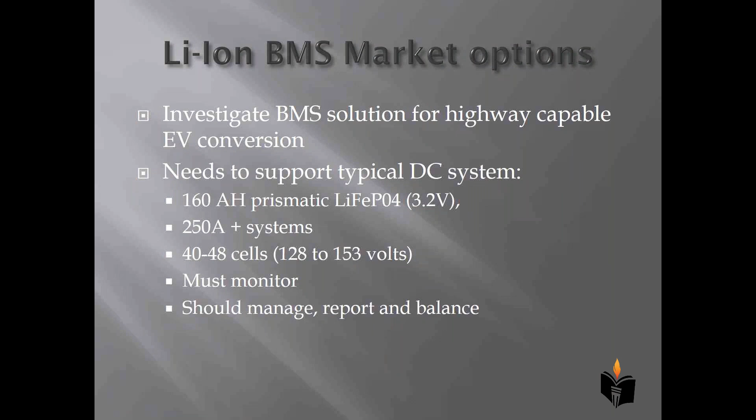So let's elaborate on it. The lithium ion BMS options we could have: Agni Motors Stybrook Limited, which has the distributed topology. I again review the type of topology we discussed in our last session, on Wednesday, not Thursday. We discussed three types of topologies: distributed, modular, and the third one missing here, that is centralized type of topology. So we discussed three types of topology.

Accordingly, we have to select the particular manufacturer based on which type of topology they are giving us, and whether they have all those functions included or not. That is a consequence we need to always consider while doing the selection, for our own car as well. We need to check, for reference, which type of BMS they are using, and for how much life cycle it can go up to. These are the certain facts we always carry on, and accordingly we select one type of BMS.

So in the distributed topology from Agni Motors, we could have number of cells about 1 to 200. How much battery is balanced during depletion and state of charge, they let us understand by indications, either by highlighting a particular red color code, or just giving indications. Temperature would not be available, display will not be available, fuel gauge will not be available, over volt protection will also not be available. Communication will be through wire, by putting up the wire.

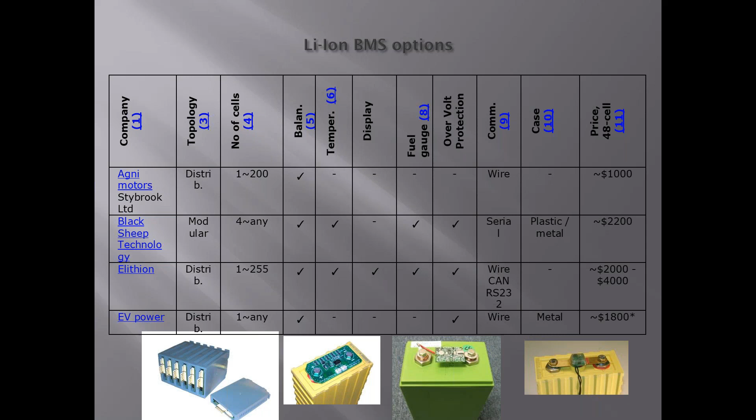Similarly, let's take a look at this. We have high tech systems, SSI, Ningbo, Yangming, Elite Power, BMS 50, and PackTrakr from KJ Hall Motor Company. Pack Tracker is, by default, what many e-rickshaw developers have already adopted this topology if they are making it for high extent or high valued e-rickshaws. Likewise, Mahindra have just recently adopted one. So such e-rickshaws having lithium battery are certainly taking up Pack Tracker. However, REAP systems, we have Volt Blocher.

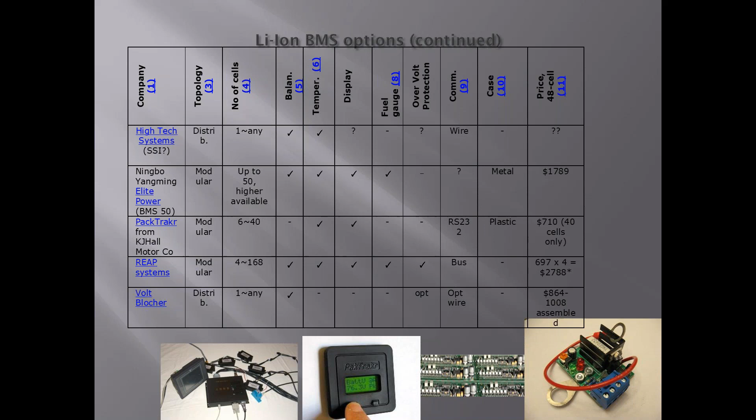Most commonly we could have the modular type of topology, and some of them would have distributed type. Centralized type has not yet come into the market, but it's in process and it will get developed, unless it should not get heated up due to the operation. So that's a thing they need to keep in mind while processing further for the BMS.

Small print we can take up for the lithium ions. I would suggest you guys go up with this slide and read it thoroughly on your own. I'm just giving you a summary, that there is an organization who actually deals in lithium ion BMS. They certainly make a particular whole structure of the BMS, and they try to possess which type of technology they have adopted, either in the term of analog or in the term of digital.

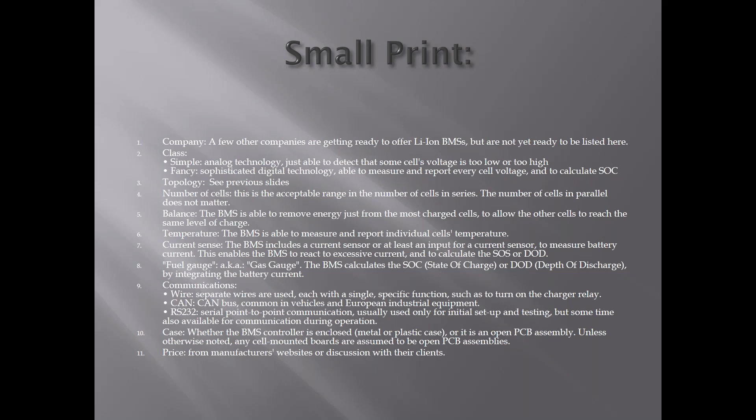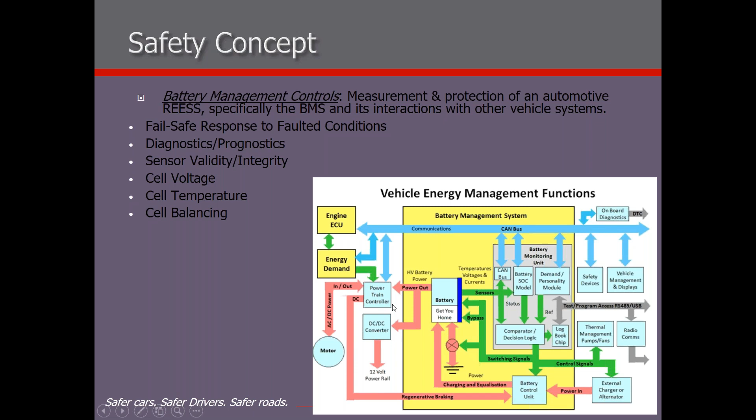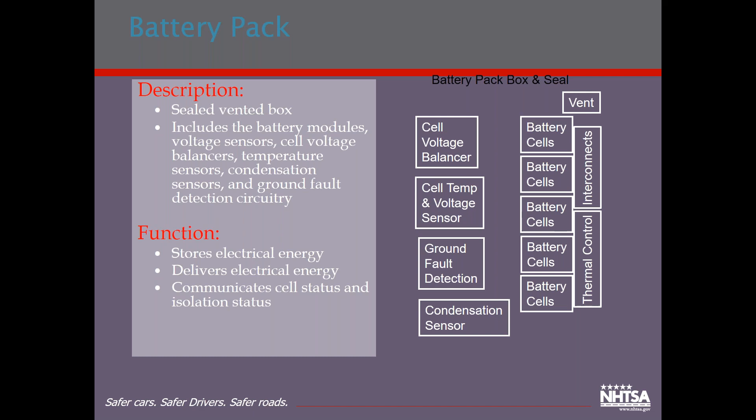Then what basically does your battery pack do, we all know very well, but some of the things we can add: it stores electrical energy, delivers electrical energy, communicates cell status and isolation status. Battery system management controller, what they should do, you can internally see how they are basically connected to each other. They start with the charge control and end with the condensation monitor.

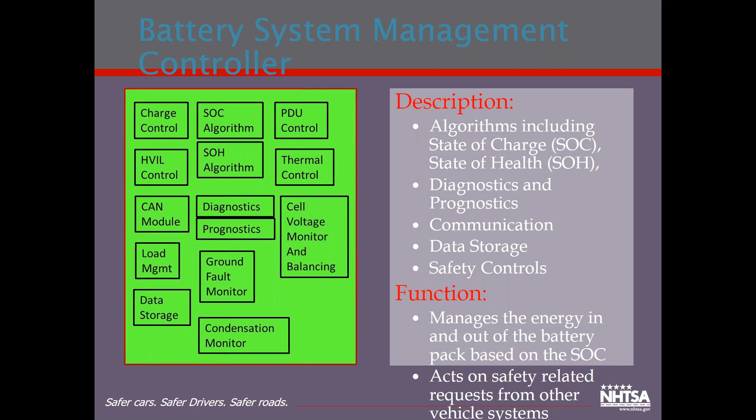How the particular functions can be managed: it manages the energy in and out of the battery pack based on the SOC, and acts on safety related requests from other vehicle systems as well. So safer cars, safer drivers, and safer roads will help the BMS controller act in actual condition and well-being.

Power distribution unit, you can see here the particular relays and fuses which we haven't touched yet in any control units, that will be available into our power distribution unit. We have main contactor, pre-charge contactor, relays, and fuses. However, description: we could have main contactor, pre-charge contactor, relays, and fuses.

We all know that relays and fuses are what they're meant to be and how they can be rationalized. Functions we can have here: controls connection between the battery pack and the high voltage bus, ensures that the system power limits are respected.

That means your system is in a type of like we can say savior for us, is the PDU. All along we already went with the particular battery pack and BMS controller. However, PDU will also play a crucial role in it, which actually helps to keep them safe, and we can generally operate at a good extent as well.

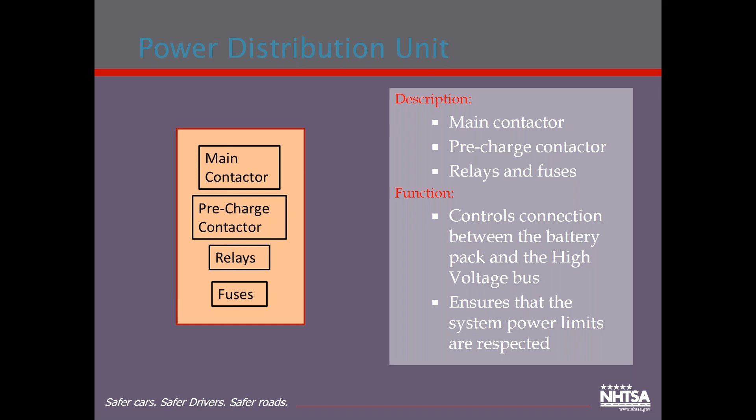So interface we can see here, how the interfaces are there for the RESS. There are some colors we can see: the HVDC bus having the red color, CAN bus in green, the dedicated CAN bus meaning only point-to-point connections are available. Input and output line is black.

Coolant is also there. Now, according to these particular lines, we can try to understand how they are connected to each other. So your charger controller will be the primary part, and then we have the RESS internally, that is for your rechargeable energy storage system. PDU, battery management and battery pack will all be included in it.

Basically, they all get connected towards our other outer accessories which are already available. Likewise, HV systems, high voltage systems, those accessories or interior components we are using for high voltage, they can also be monitored by this HV system.

Vehicle system controller - the particular traction during driving conditions, how the particular ESP or ABS can work, that can get fulfilled by the help of vehicle systems controller.

CAN based controller and devices, then HVIL loop and thermal control. So these are all the aspects which become a type of add-on feature for this RESS external interfaces.

Internal interfaces we have already discussed, in which we had power distribution, battery pack and BMS controller. Now if we come to the external interfaces, those are here: HV systems, vehicle systems controller, CAN based controllers and devices, HVIL loop and thermal control.

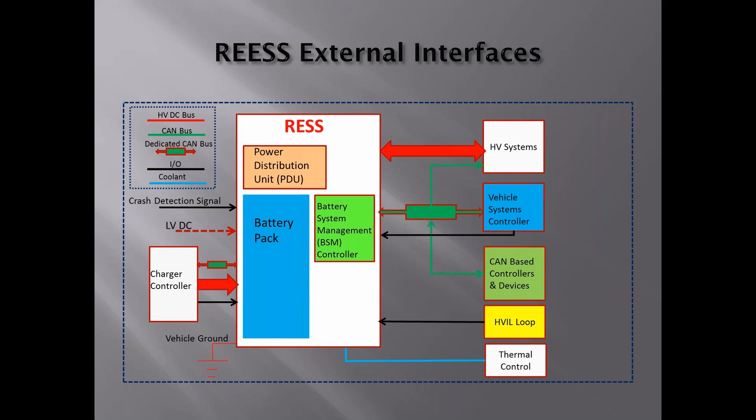Scope of external interface - there may be highly flammable and high voltage danger also available. So we need to always analyze the particular impact on the safe operation of the RESS and check that the interfaces are duly packed well, and there should be no open area which may cause problems afterwards.

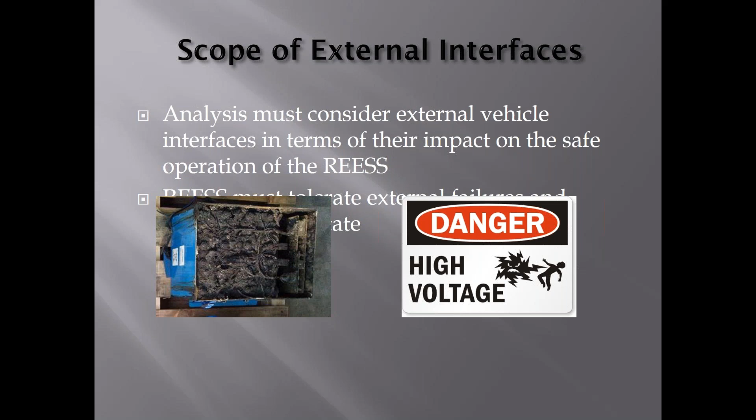So there are some signs we can use, like danger, high voltage, certain facts we can show, then people will be aware that this should not get impacted from anywhere, and it should be on the safer side only, so that fire causes should not happen and it will be in our control. Diagnostic trouble codes - if we try to understand in our electric vehicles, there are certain patterns which suggest to us.

This should be mentioned by the OEM or the manufacturer while they are delivering the car.

Now, as per the topology we have learned, we can see here how they have used it in their vehicle during the indication terminology that needs to be triggered, and how things are monitored there. So we'll divide it into 4 topics: system status, charge state, low charge, discharge rate or range.

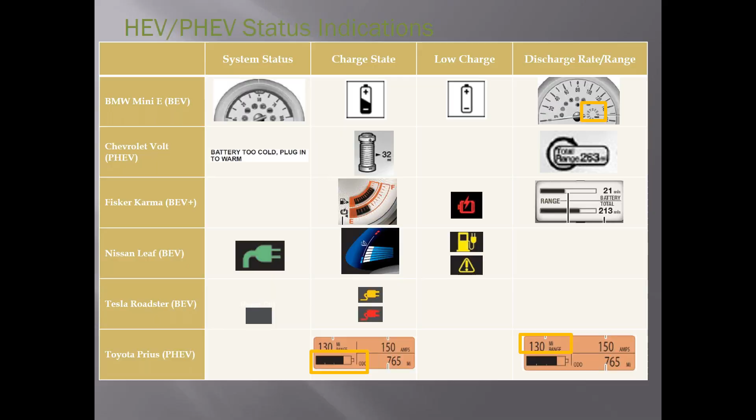So this is the particular BMS system which we're trying to understand over the last 2 to 3 sessions.

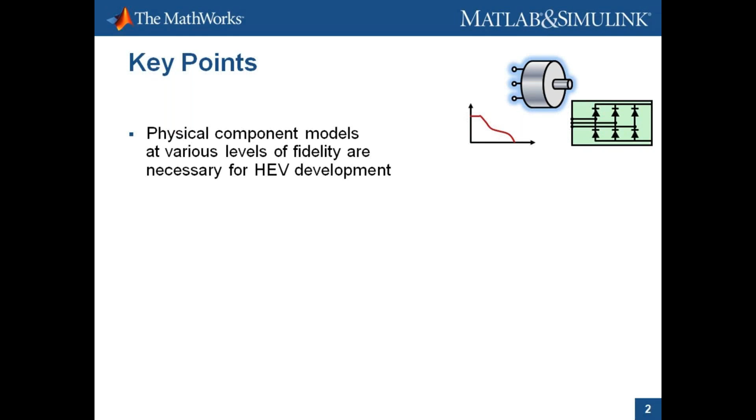All right, so let's continue with this. There are some key factors we need to come up with, and accordingly this will be processed. Physical component models at various levels of fidelity are necessary for HEV development, that is for hybrid electric vehicle. However, the motor is the main concerned part, and certainly we have the engine that should be downsized. So by keeping our eye on these two key objects, we need to understand how much capability will be applicable there.

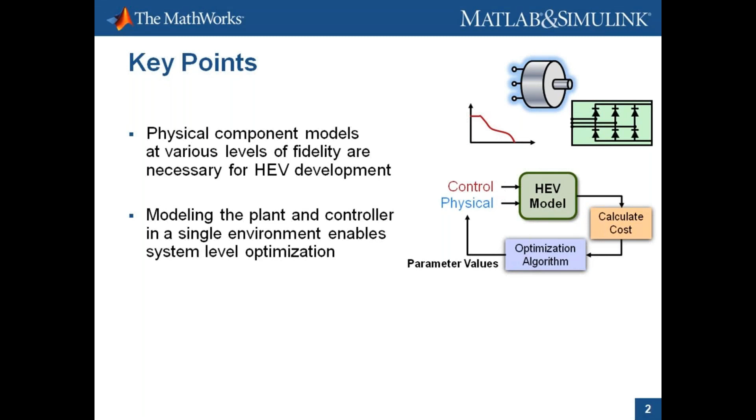Modeling the plant and controller in a single environment enables system level optimization. A system level optimization can be done and can give you information on how much we need to economically check with, and certainly understand the parameter values. This is done by integration with MATLAB and Simulink, which enables efficient post-processing and deployment.

Going forward towards MATLAB understanding, let's take a look at what MATLAB is meant to be nowadays and how things are changing day by day using MATLAB based design and Simulink. Let's take a video look at this, and this will help you understand where you are if you are using MATLAB and how you can reach up to those extents which are really applicable and more in demand in the upcoming time through MATLAB in the automotive world.

Let me share the media.

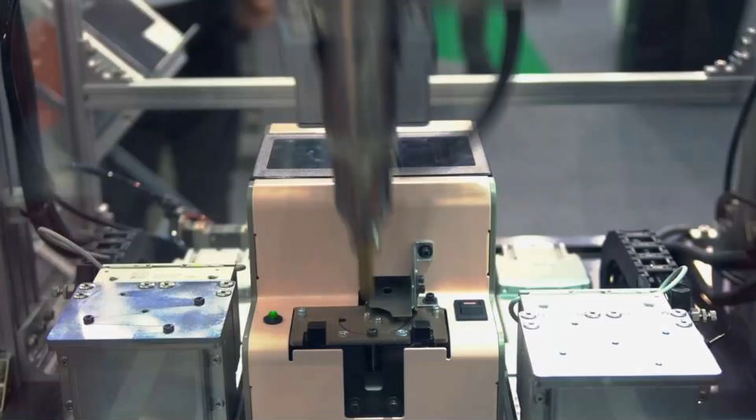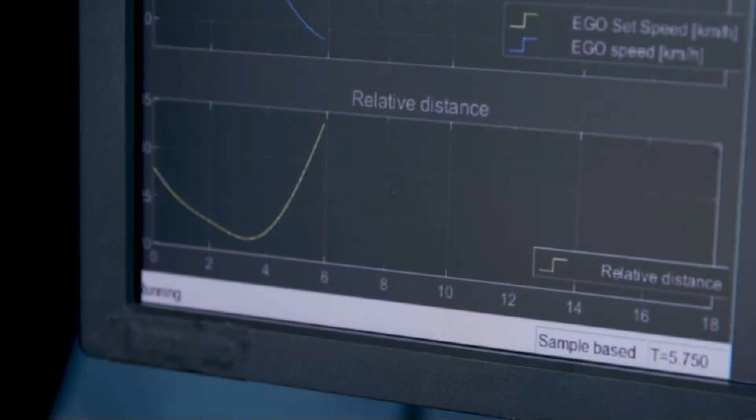Intelligent systems drive the technology of daily life. They're powered by megatrends like electrification, connectivity, autonomy, and artificial intelligence. As these systems get smarter, the software embedded in them incorporates ever more powerful algorithms. For example, an autonomous electric car with its advanced propulsion, perception, navigation, and safety features will run on an estimated 250 million lines of embedded code. Developing this complex code requires the use of system models throughout the design process.

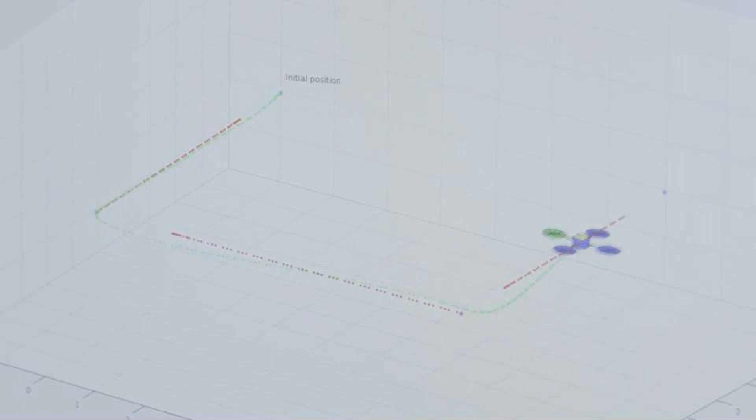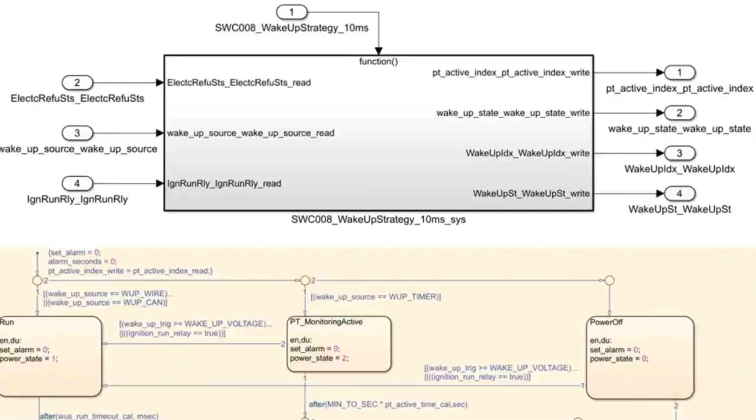At MathWorks, we've perfected such an approach, model-based design. And we've created software tools that give you the power to innovate by making it easy to try new ideas, exposing design problems early, automating steps such as code generation, and speeding up the overall development process.

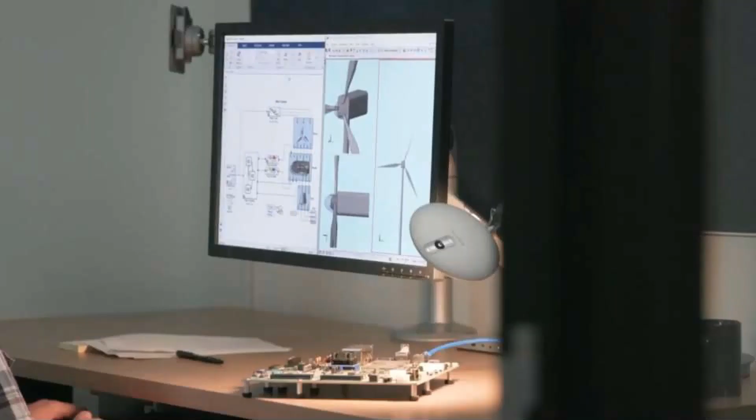Model-based design begins with a system model where you capture ideas and requirements. The model is an executable specification that lets your team collaborate across engineering roles and modeling domains to quickly explore design trade-offs. You simulate the model on the desktop or in real time to verify your design meets requirements, reducing the need for expensive prototypes.

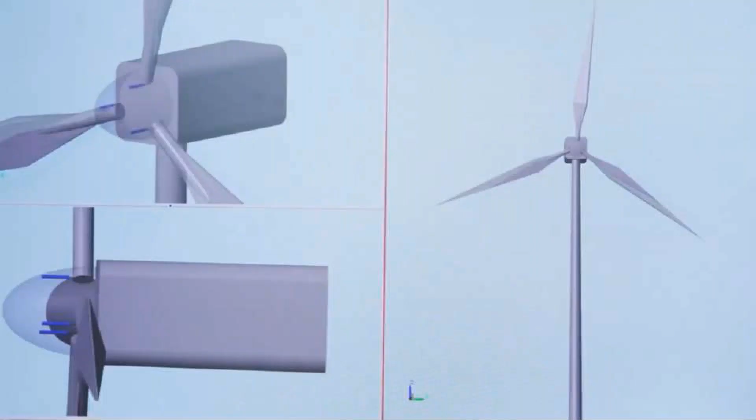With each iteration, you refine the system model to optimize your design. When your design is ready for implementation, you generate code automatically, which eliminates hand coding errors. Finally, you verify your implementation through simulation, processor-in-the-loop, and hardware-in-the-loop testing.

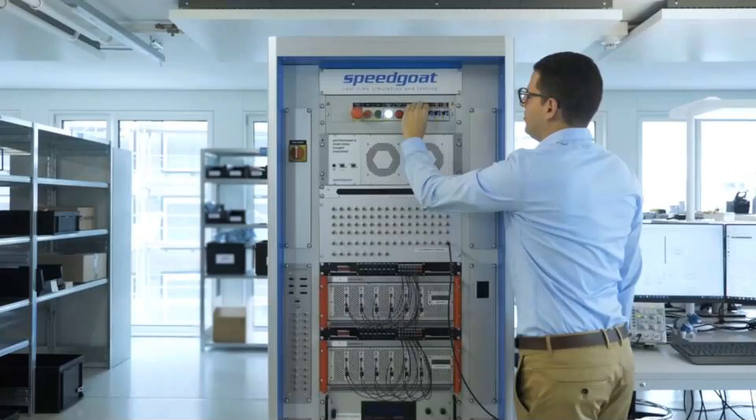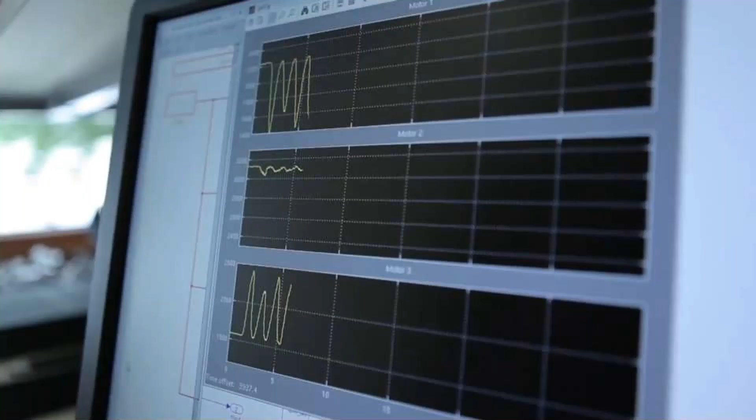By moving design tasks from the lab and field to the desktop and cloud, model-based design is transforming the way engineers and scientists work, and it's advancing research and engineering education at thousands of universities worldwide. Learn what model-based design with MATLAB and Simulink can do for you.

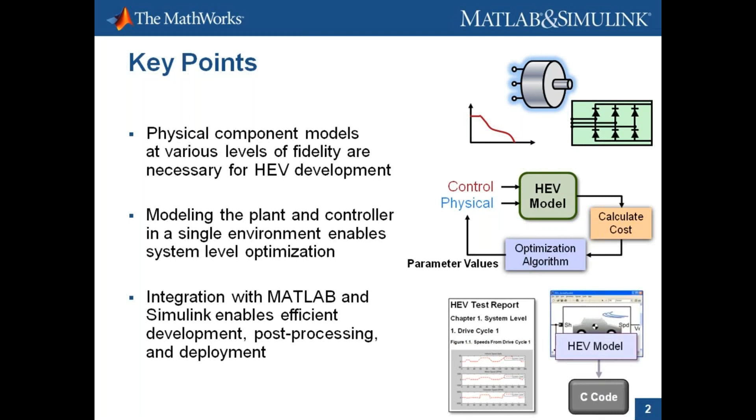A hybrid electric vehicle test report we can get during the life cycle. Our agenda includes overview of hybrid electric vehicle modeling, electrical, mechanical, thermal and other domains, mode logic and control systems, simulation and post-processing depending upon optimization and parallel computing, report generation, power quality analysis, deployment or integration, and local solver or code generation.

For the overview of hybrid electric vehicle, we have a model which is already available by default in MATLAB. We get the model onto our workbench and start modeling as per our own convenience or need. The changes and effects we make depend upon certain factors.

Those factors are electrical system, mechanical, thermal or other domains, mode logic and control system. These are all certain facts. Then we come to simulation and post-processing.

During simulation and post-processing, we need to understand the calculation type - where the particular calculation should be computed. We take measurements initially and measure the concerned parts of the electric car or HEV, trying to complete the whole process within a certain time period. But during that time, we may not be able to compute all the data logics going on in parallel.

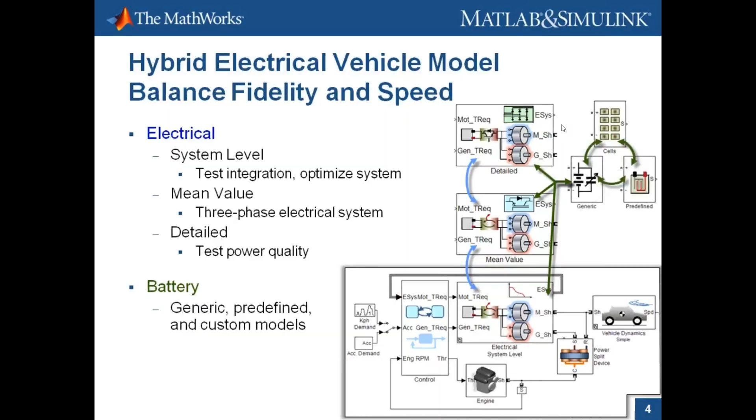So what do you suggest, guys, should you go through with all of today's training? Thanks, Manav. How about other members? Can you please give me a confirmation on it? Thanks, Raju. Thanks, Krishna. All right.